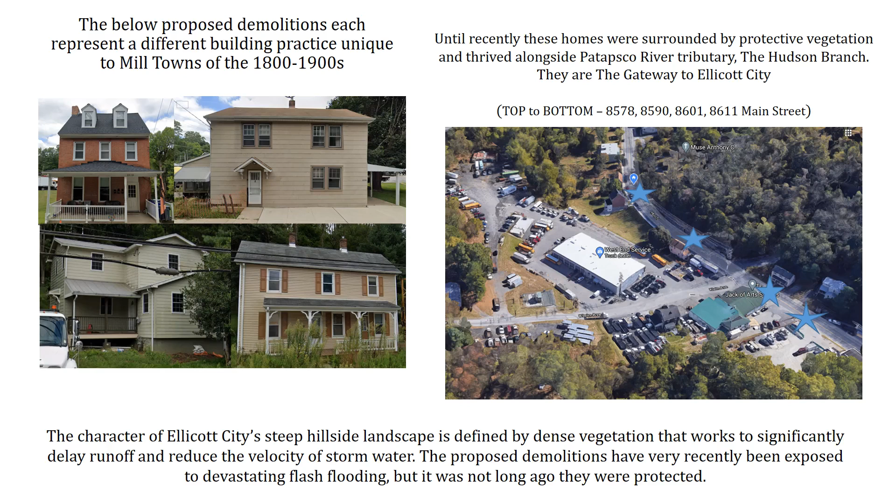Is the Army Corps requiring proponents of demolition to use sufficient rigor in verifying accuracy of models? Is the Army Corps confident that the high-flow bypass culverts used at 8777 and 8600 Main Street would not increase velocity and destruction in the community? Have the limitations listed in the December 2019 review been appropriately resolved? Or do they remain as outstanding gaps in necessary information?

The installation of culverts inside the working floodplain will result in increased velocity and flow. Why install a new set of culverts at a considerable expense when a whole range of maintenance is neglected? Howard County Department of Public Works will promote the claim that the 8600 culvert is the biggest threat to safety and risk. But that's nothing more than an empty mantra.

The overflow at the 8600 culvert was caused by filling it with shotcrete after the 2011 flash flood, reducing the culvert from 108 inches to 84 inches. And the degradation surrounding it was caused by removal of trees and a floodplain wall.

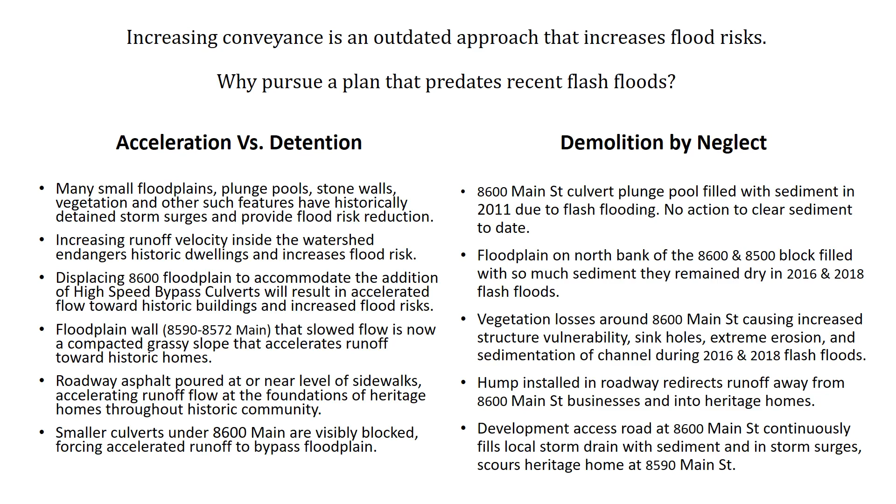We have ample opportunity to slow the flow and direct runoff into detention areas. This town was literally made to move water. The benefit of using natural flows and buffers is a slower flow that preserves the resilience of the entire historic community. These measures are not only simple in concept, they are far less costly than adding expensive culverts, sacrificing working floodplain, and demolishing historical treasures.

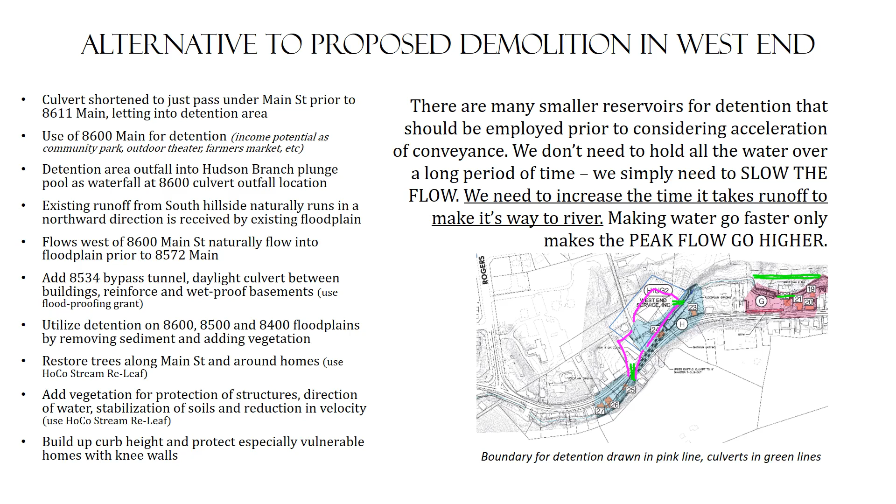The 1809 foundation was exposed more than 6 feet below grade. The underside of Main Street washed into my basement workshop through a coal chute that was exposed when scouring rapids cut the earth out from under a concrete barrier.

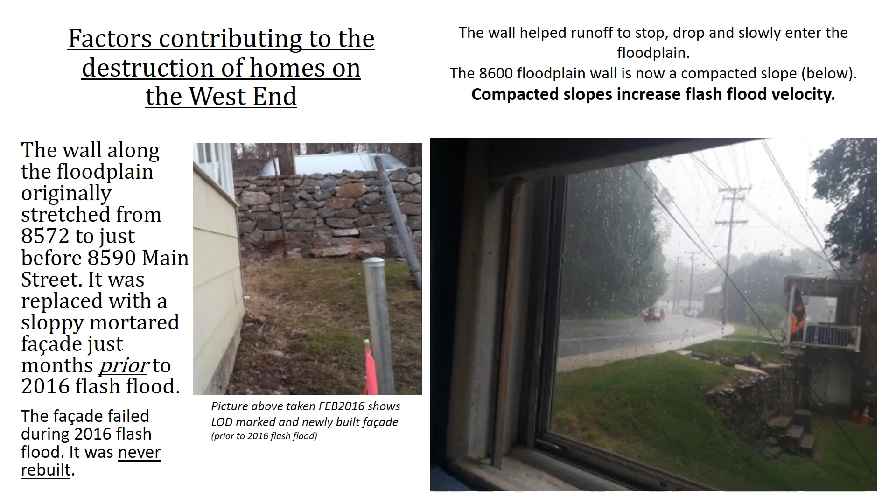Sediment and debris accumulation is slowly pushing the Hudson Branch away from West End service and toward historic homes. The 8600 culvert plunge pool has remained clogged since the 2011 flash flood, and the channel continuously fills with erosion, causing flash flood waters to accelerate toward historic homes along the south bank and downstream. The loss of vegetation in this area has caused literal tons of erosion.

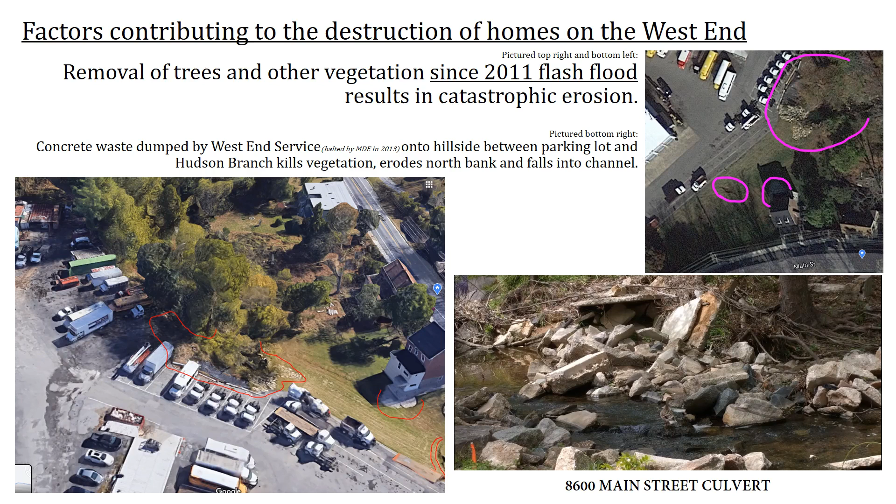The second and third floor apartments of this home have remained occupied almost entirely without interruption through all 3 devastating flash floods, and all 3 apartment homes continue to be occupied today. The velocity of runoff from the south hillside is a significant threat at this location, as flow naturally crosses Main Street and fills the floodplain in this very spot.

This unfortunate heritage building has been set up for disaster, but 8590 can be made resilient, affordably and with relative ease. The home as it is, is completely defenseless. The parking lot, road, and sidewalk are all on the same level, which means all this pavement accelerates high velocity flow directly into the sill plate right at the top of the foundation.

In addition to the 8600 culvert being filled with shotcrete and inducing overflow, there is a high velocity torrent coming from the development access road at 8600 that scours the southwest facing corner of this home.

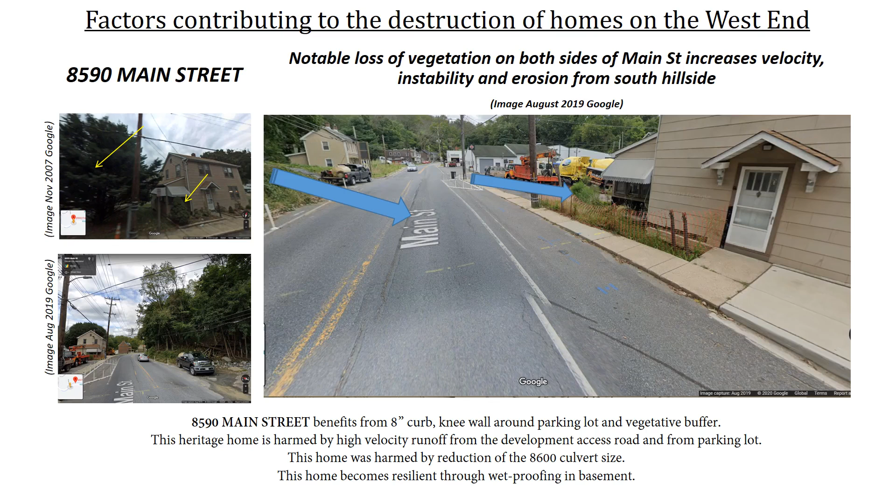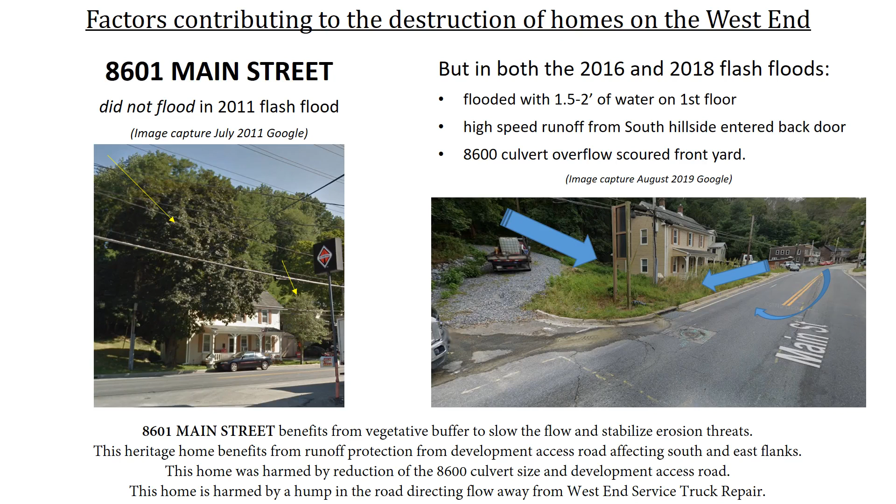This home is a good example of the many heritage buildings connected to the South Hillside. Homes backing to the South Hillside like this one require mitigation from behind and a knee wall with drainage between the front door and Main. This modernized historic home is an example of the resilience that can be achieved inside this valley community.

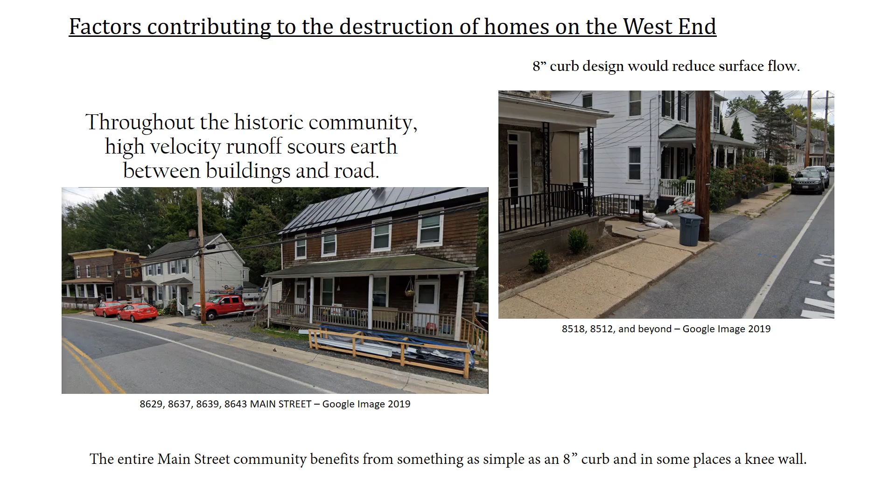Main Street is continuously repaved without regard to the impact of high-speed runoff. These runoff ramps accelerate high-speed floodwater into historic buildings, often where the foundation meets footers and wood framing. Our entire community suffers from accelerated flow down our steep slopes. Nearly every home built into the South Hillside is beaten from behind.

The 8600 culvert project does not slow this flow. Instead, it ignores this problem and adds more water faster. This plan sacrifices resilient heritage homes on day one and countless more as real mitigation efforts continue to be neglected. This plan ignores the relevance of natural flow and usefulness of resources.

From ridge to river, our hillsides drop runoff aggressively into tributaries. In less than 2 miles, we have more than a 200-foot drop in elevation. In a standard urban environment, it is common to enlarge culverts and collect as much water as quickly as possible. The goal is to accelerate water into channels and enlarge those channels as much as the location permits. But here in Ellicott City's Milltown, that industry standard has lethal consequences.

When we understand that velocity is what is most destructive in historic Ellicott City, then it's much easier to understand why this site at 8600 is such a blessing. It is a natural detention area that happens to be located right in the path of one of our most potentially destructive tributaries.

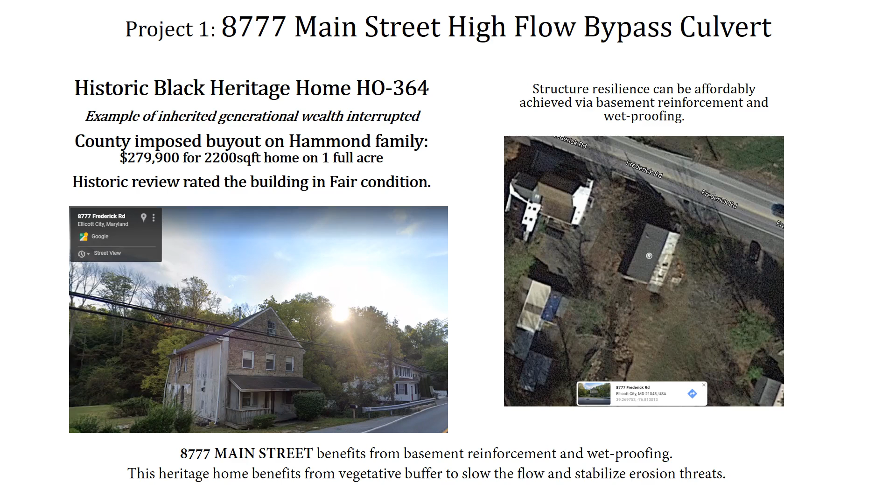And for the sake of all that is right and good, please let us return this inheritance back to the Hammond family better than we found it. This is a plan that will remove water from above rapidly, which serves interests above, but adds risk to those downstream. Interest in preservation requires that we understand the high-velocity runoff threats to the historic community. If our goal is to slow the flow and preserve the historic town, then this plan works against that purpose.

We need to focus on increasing floodplains, increasing detention, increasing vegetation everywhere possible, and maintaining working features such as floodplain walls and plunge pools. This plan abandons all that we know to be effective flood risk management. The additional culverts not only add the cubic foot per second equivalent of a 115-inch pipe, the velocity is further accelerated by a drop in slope that is almost 2 feet greater than the original culvert.

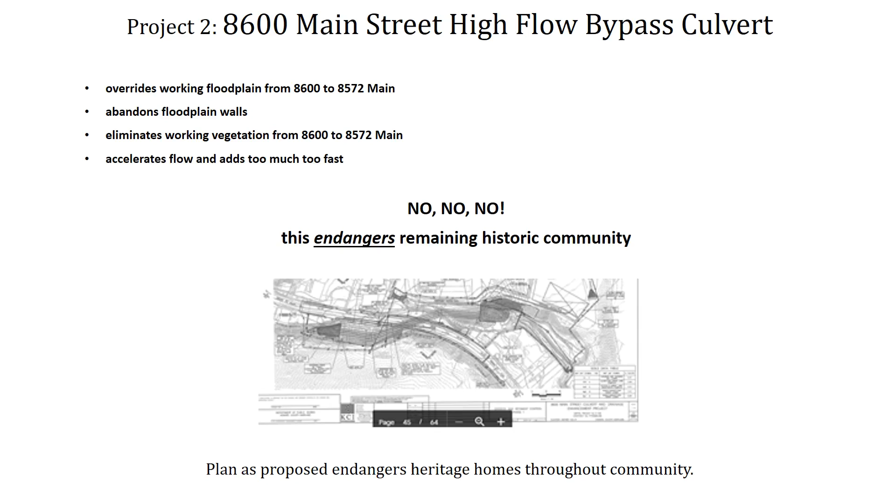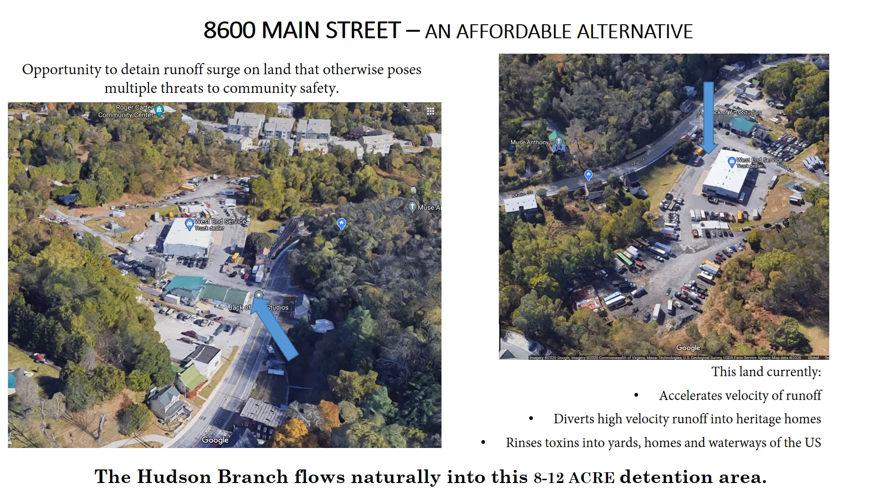The entire historic community downstream benefits from using 8600 for detention. This site can support detention through increased storm intensity as well as continued development in the region. Instead of all of these pipes going around the trucking company, bypassing floodplain and demolishing homes now, destroying more homes later, we can go straight across the street with a much shorter set of pipes and use the 8 to 12 acres for detention. That's 2 of the 108-inch pipes at 100-foot length. That's far less costly than 4 66-inch pipes at 700-foot lengths, plus 700 feet of a new 108-inch pipe. Land remediation funds exist at the state and federal level, and use as a park can bring sustainable income.

The 8500 block regularly floods Main Street, even in small rain events. In storm surges, heritage homes are scoured by high-velocity flow from the south hillside. Accelerating flow into the 8500 block from the 8600 culvert is not an option, but detention is an option, and existing floodplains have gone abandoned, but they can be recovered with an effort that could be as simple as a large volunteer workforce with shovels, buckets, and plants. The soils removed from the floodplains could then be used to build a berm along Main Street. There's too much opportunity to improve flow for us to give up and let this beautiful and meaningful place cease to exist.

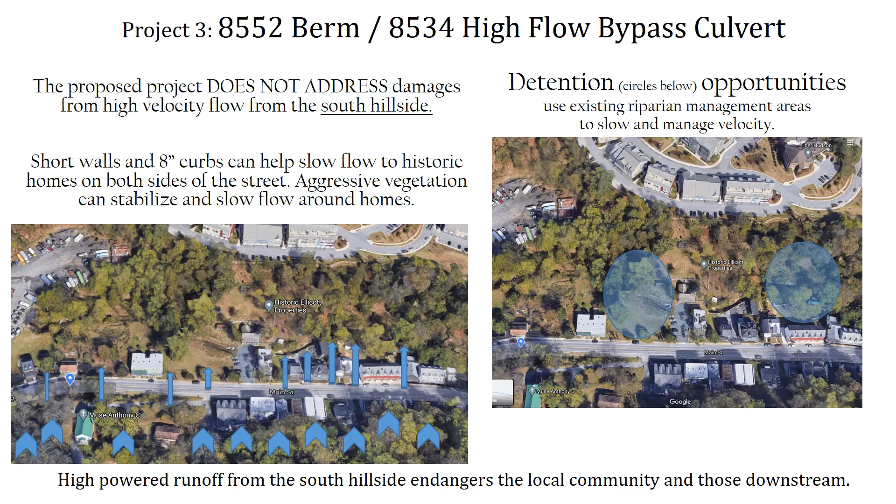My home, 8572 Main Street, survived the 2018 flash flood with no water entering the home. I am not as confident that I will be able to protect it from the threat that the current 8600 project presents. My confidence in the resiliency of heritage stone and framed structures comes from firsthand experience. The basement of my home flooded in 2011 and 2016, but not in 2018. Believe me when I say I have studied the flow of water here and it can be managed. And please believe me when I say that it should not be accelerated. I repeat, we cannot afford to accelerate flow in Ellicott City.

What destroys us the most is water all coming down at once. And it's not just large storm events. Our channels and the ground beneath us swell from everyday storms on the ridges above us. It doesn't even have to rain here for our channels to swell to their banks. It is so important that we focus on slowing the flow for today's community and for generations to come.